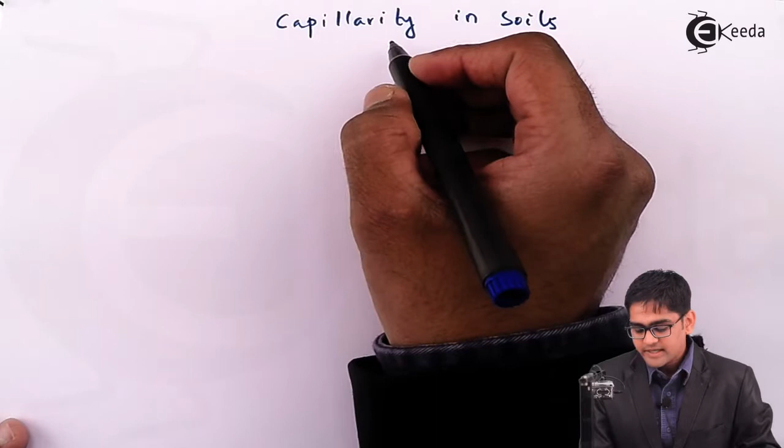So just now we have seen the principle of effective stress, and we'll move ahead with capillarity in the soil. This is closely linked with the previous chapter on effective stress. Capillarity is a phenomenon by virtue of which there will be a rise in the water level above the natural groundwater table, and therefore the soil will remain in a fully saturated condition.

So if I draw the ground level, and the groundwater table, the soil below the groundwater table is called saturated soil, remember, and the soil above the groundwater table is considered dry soil or moist soil, depending on the degree of saturation. But because we have the groundwater table, there is a tendency for something to happen.

In between two successive soil particles there will be creation of a small void, and because of this creation of the small void, water in the groundwater table will rise up to a certain level. I consider this as generally being this level. So this is the rise in water level, and this is because of capillarity.

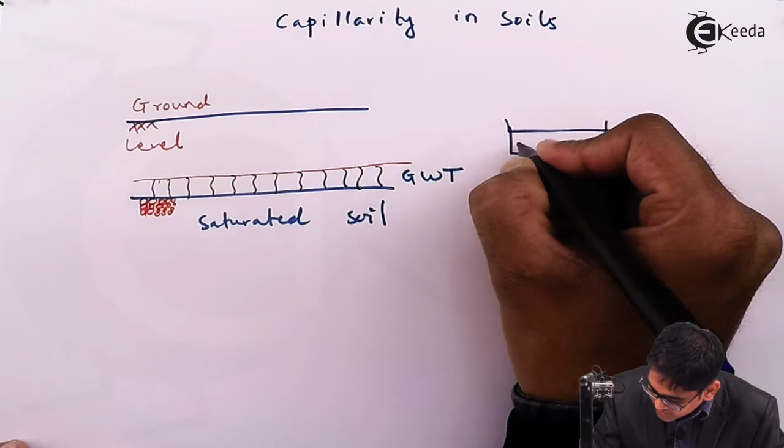This is the same phenomenon you have studied in fluid mechanics. What you studied there is very simple: you take a beaker full of water and insert a small diameter pipe. This diameter is very small. Because of the insertion of the pipe, there is a rise in the level of water, either rise or fall depending on the nature of the fluid.

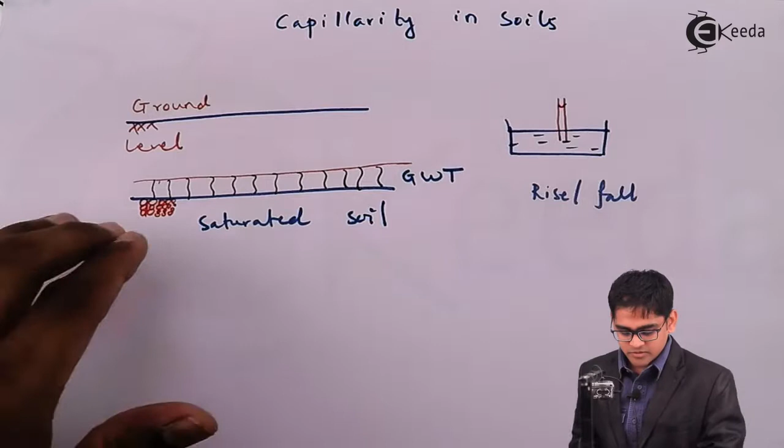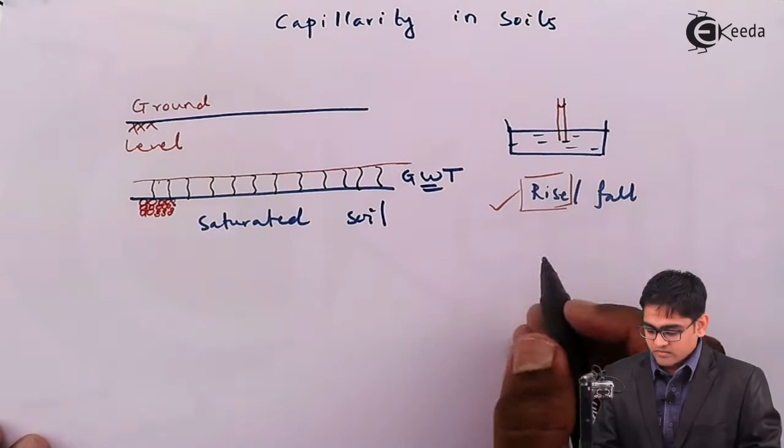Remember, there is either rise or fall. Since in case of soil we almost always talk about water, we'll deal only with this rise phenomenon. We won't speak about falling, because fall is only possible in case of mercury, as you have seen. Similarly, as I said, we'll discuss only the rise, because it's water, so in water there has to be a rise.

This zone up to which the soil is saturated by the capillary water is called the capillary zone, and the soil in this zone, remember, is fully saturated.

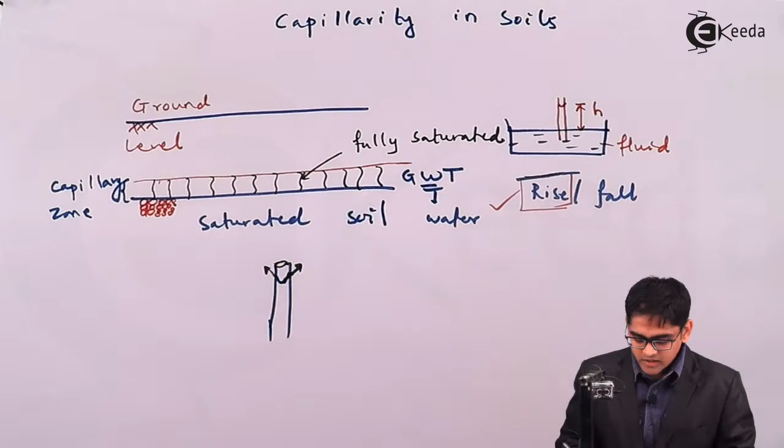This is very important, and I'll derive the expression for the rise in the capillary tube H with the surface tension properties of this fluid. It is a very simple derivation. If I insert the tube, the water will rise and form a concave shape, as shown in this figure, and along the perimeter of this tube there is a force called surface tension force acting around its perimeter, denoted by sigma.

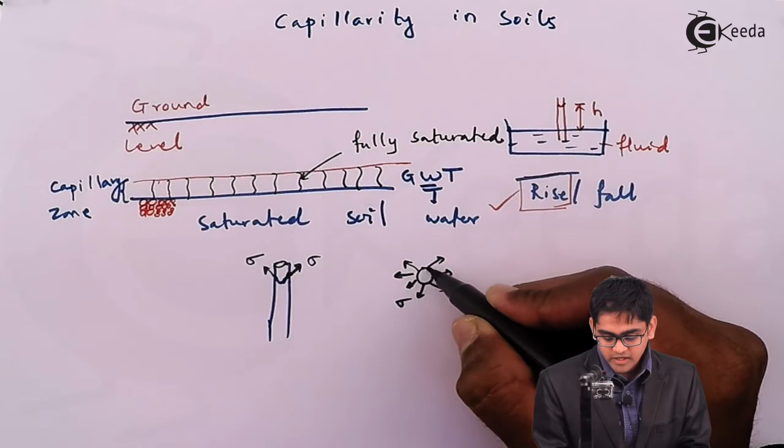This sigma, the surface tension force, is acting uniformly, meaning the force does not change as you move across or along this perimeter. This force makes an angle equal to alpha with the vertical face of the tube. This is the plan view, and this is the elevation. In plan it looks like this, and this is the diameter of the tube, which is very small, denoted as small d.

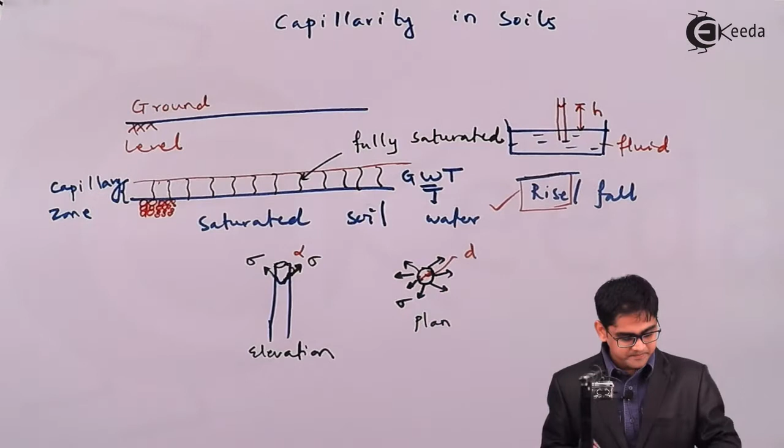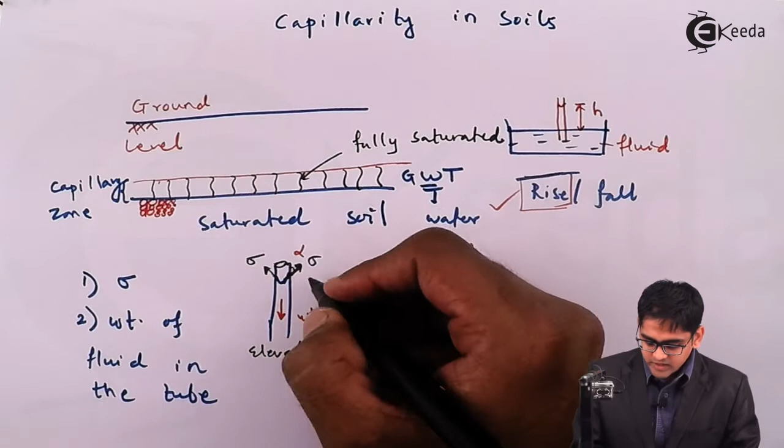So first of all you've got the surface tension force sigma, and second is the weight of water or fluid in the tube. You need to balance the weight of the fluid in the tube with the surface tension force, so that the system is in equilibrium.

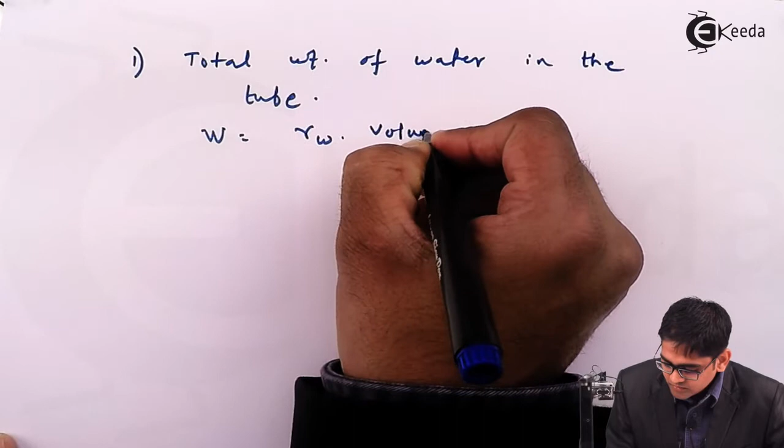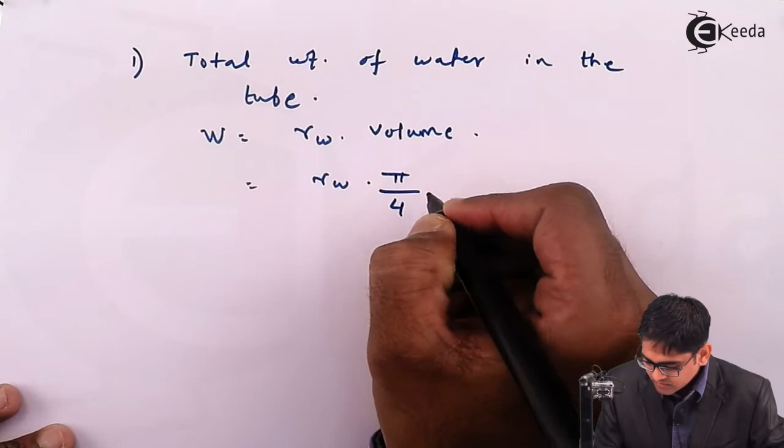So the total weight of water in the tube is easy to calculate - it is nothing but gamma, the unit weight, into volume, and volume is the volume of the tube, meaning the volume of this part only. It is pi by 4 into small d square into h, where d is the diameter of the tube and h is the height. This is how the weight is calculated in the tube.

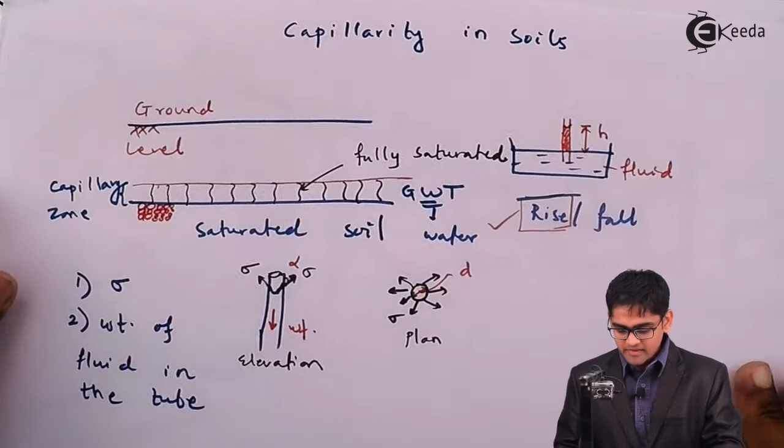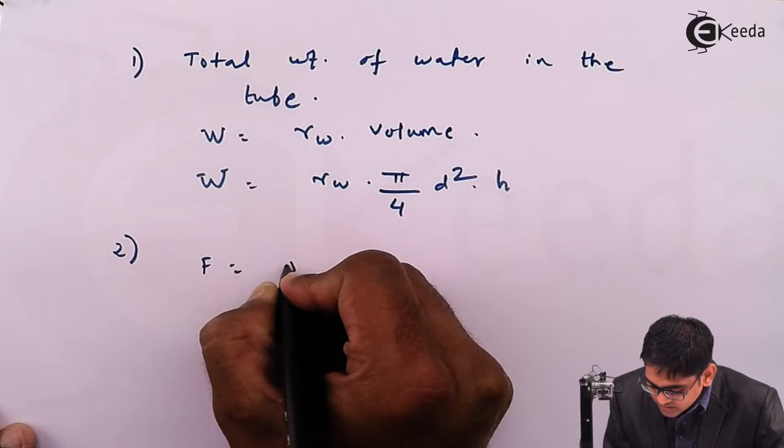Second is the surface tension force, which is responsible for pulling up the water. By virtue of the surface tension, you get this capillary phenomenon in the soil. That force is nothing but surface tension force into the area at which it is acting. Looking at this figure, sigma is the surface tension force acting all around its perimeter, so the perimeter becomes the acting area. Therefore it becomes sigma into perimeter, which is nothing but pi into d.

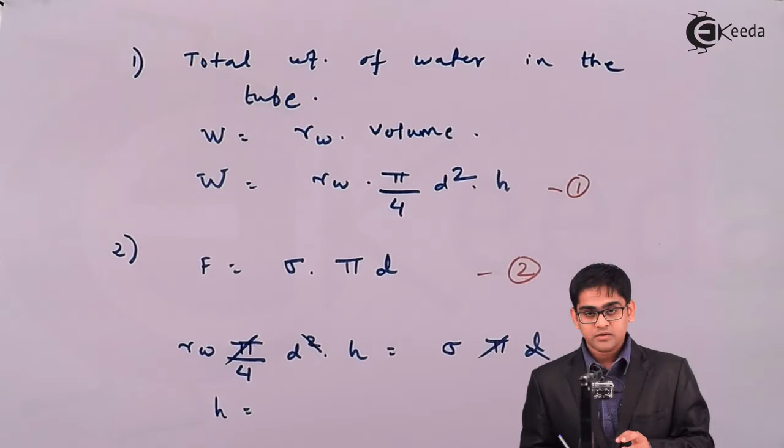So these two have to be equal, this one and this two. By equating equation 1 and 2, you get gamma w into pi by 4 into d square into h equals to sigma pi into d. Pi gets cancelled, d gets cancelled, there is nothing left to be cancelled, and therefore you get the height, which is height of either rise or fall, becomes equal to 4 sigma divided by gamma w into d.

So therefore the capillary rise becomes equal to 4 sigma divided by gamma w into d. This is again a very important expression of the capillary height rise in the soil.

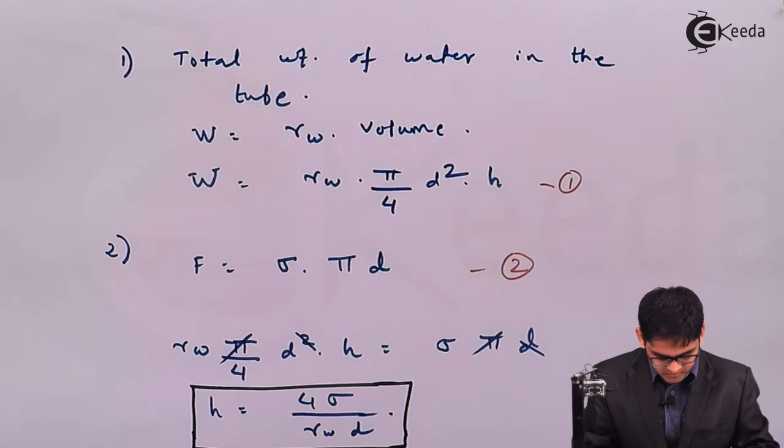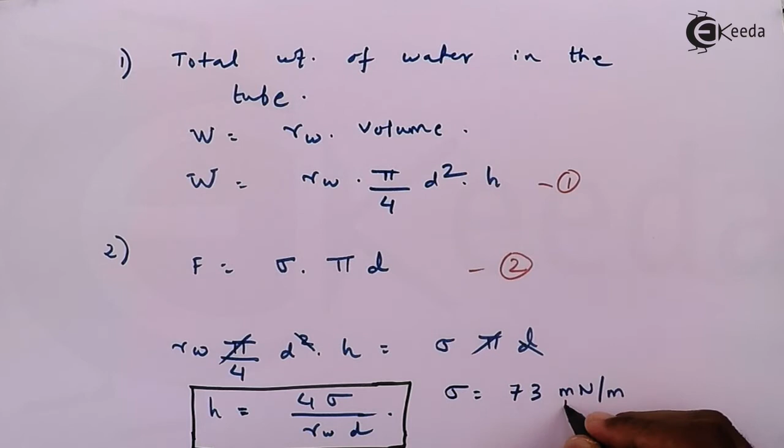This is capillary height rise, and in all normal cases for water, sigma is equal to 73 millinewton per meter. So this is milli, small m, M-I-L-L-I, milli.

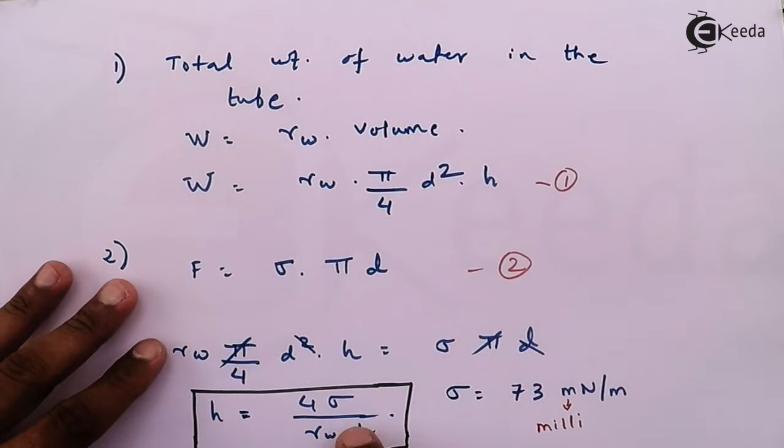So if I just place all the values in the units of Newton and meter, you'll probably get h in terms of d. So it becomes capillary height rise equals to 73 into 10 raised to minus 3 into 4 divided by 9810 into d.

You need to place d in meters. If you evaluate all this factor, it becomes equal to 3 into 10 raised to minus 5 divided by d, but remember you need to place d in meters. If you want to place d in millimeters, you'll get h equals to 0.03 divided by d, and here you will have to place it in millimeters, and this is how it is related.

But one more thing, this is the capillary height rise. So if you just reduce d, you'll get more and more capillary height rise. So as d reduces, h increases, and vice versa also true: as d increases, h decreases.

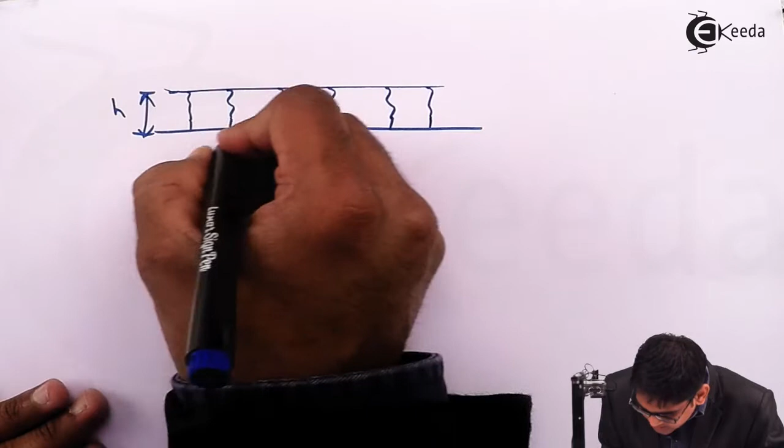So therefore I'd like to make 3 important points, which I will do in the next slide. First point is that if you got the capillary zone, suppose this is the capillary zone, and this is the height rise h, this is the existing groundwater level, and below which the soil is totally saturated.

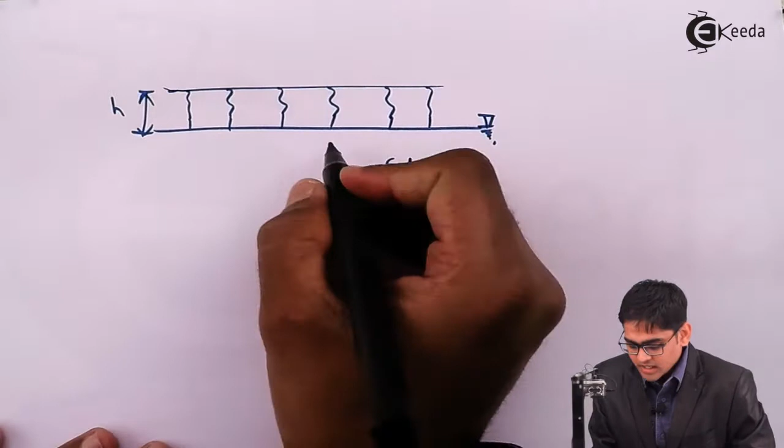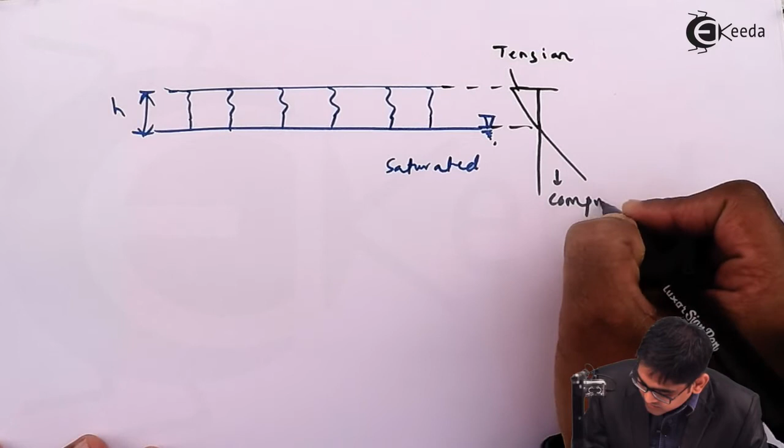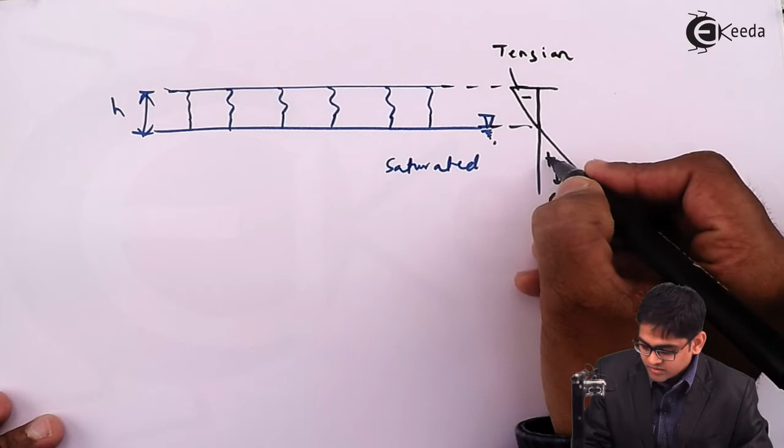Up to the capillary zone, it's also saturated. So whenever you got the capillary height rise, up to the height equals to h, there is a lot of tension into a negative side. There you got the tension, and beyond which there is a compression. Because the water is pulled up, it's under tension. So I will define tension by negative and compression as positive.

So in soil mechanics, compression is positive and tension is negative, a basic sign convention, and in strength of materials, tension is positive, compression is negative. So it actually varies, sign convention varies from one subject to another. As far as soil mechanics is concerned, remember who is in tension, who is in compression.

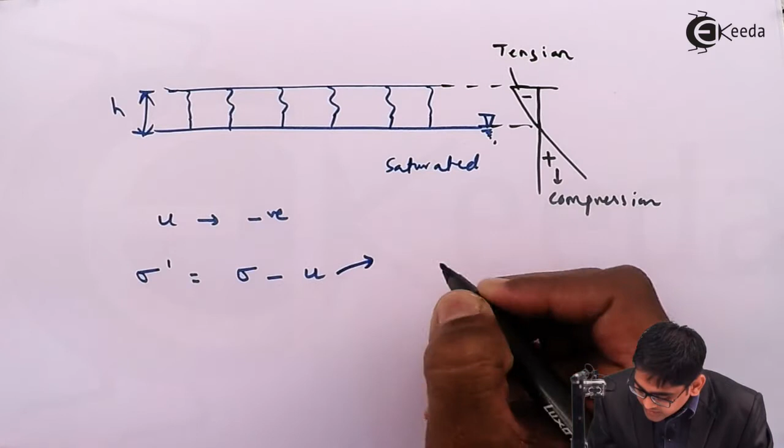So you have taken u as negative because you have taken sigma dash, which is equal to total stress minus pore water pressure. If this pressure is considered in compression, then if you're going beyond this groundwater table down, you just need to consider it with the positive sign. But in case of the capillary zone, where you end up at the tension zone, this u will become negative.

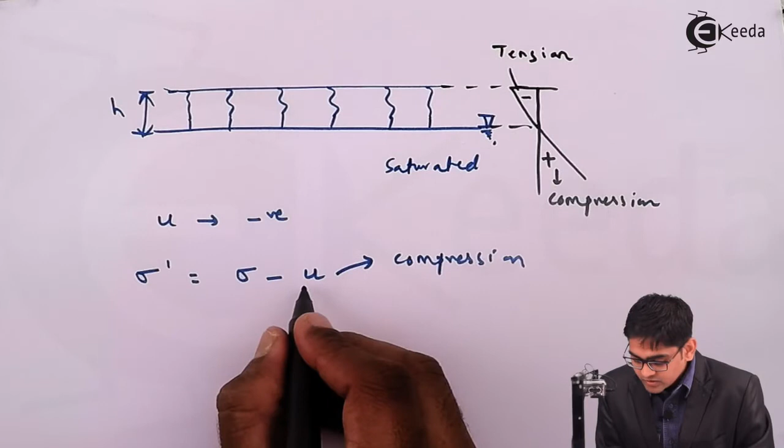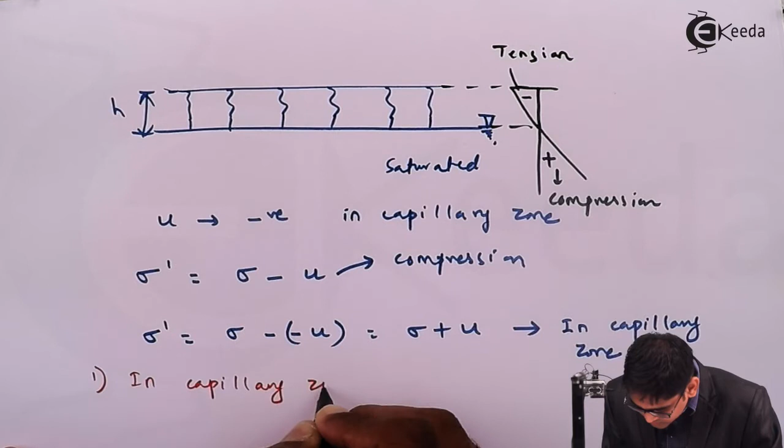Once u becomes negative, sigma dash will become equal to sigma minus of minus u, which becomes sigma plus u. So this is the expression in the capillary zone, which means in the capillary zone, effective stress increases. That is point number one: in capillary zone, sigma dash increases.

Point number two here is very important and a very crucial point. You have seen I've considered small d in this denominator part. This d is not the diameter of the grain, but d is the size of the void. Exactly, because it is ultimately a void, or the diameter of the void, which is created in between two adjacent soil particles, which is responsible for the rise in capillary action, and which is ultimately responsible for the capillarity in the soils.

But obviously this void size is related to the particle size. So there is a relation between void size and particle size, and that relation is given by Terzaghi. It is as follows: generally, what they have also given is that the diameter of the void, or size of a void, is directly proportional to the void ratio of the soil into the effective grain size of the soil, to a constant c.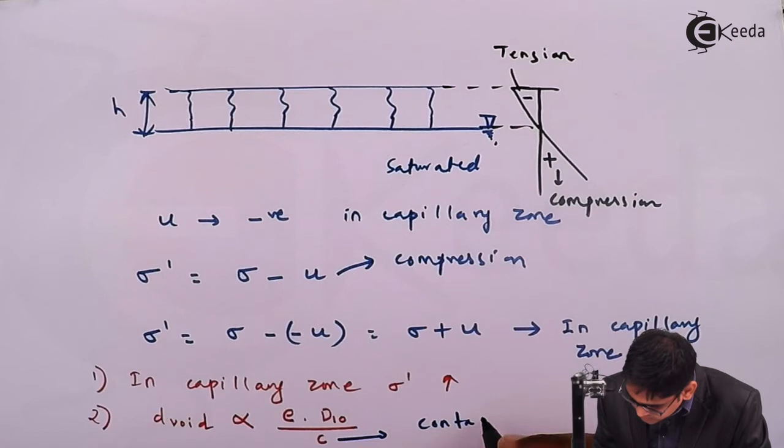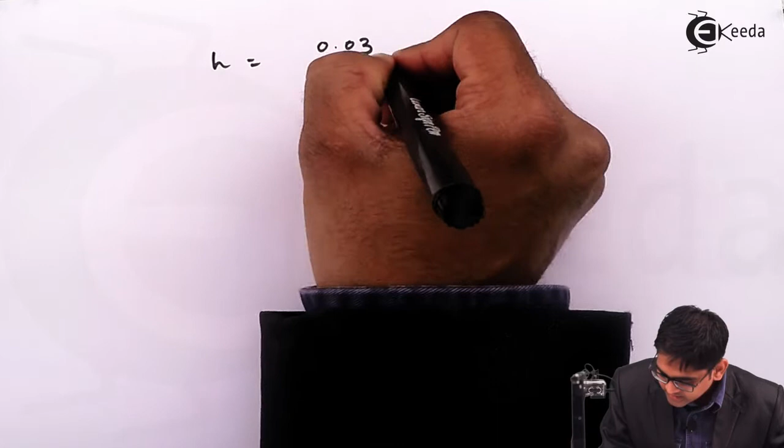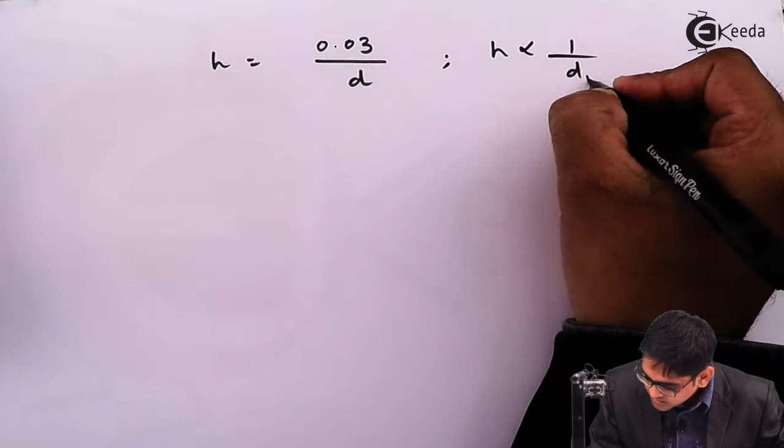They term this C as the empirical constant. After introducing this empirical constant, I'll remove the proportionality sign and make it an equals sign. If you place the d void in the existing capillary height expression, you'll get h equals 0.03 by d, where d is in mm. H is inversely related to d, and I need to place d here, because it's nothing but d void, or size of the void. So capillary height rise becomes equal to C divided by e into d10, where C takes into account this 0.03 factor and is the empirical constant.

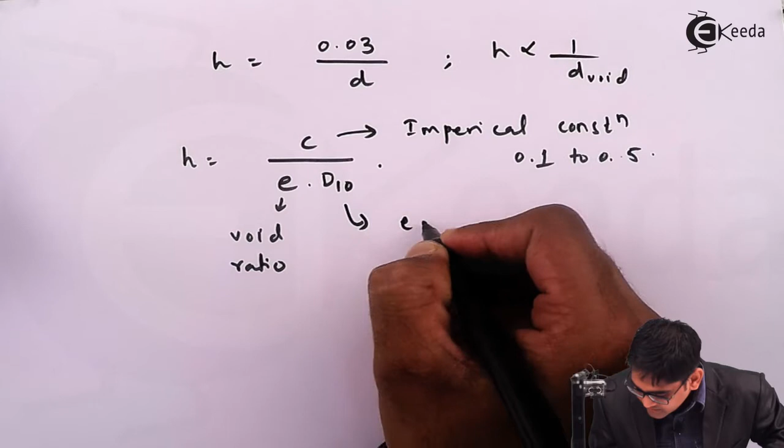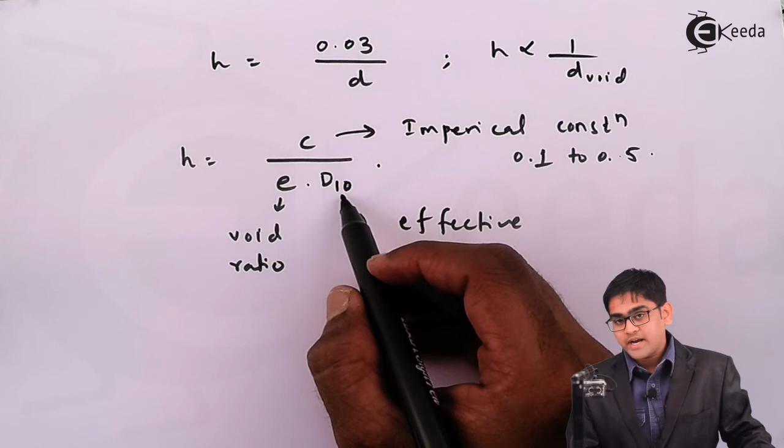It varies between 0.1 to 0.5, and e is the void ratio, and d10 is the effective grain size. We studied this in the soil classification chapter, which indicates that 10% of the soil is finer than this particular size — this is the effective size of the particle.

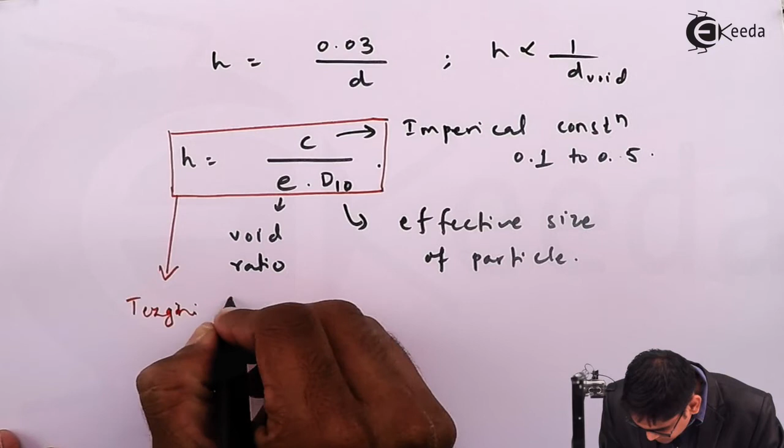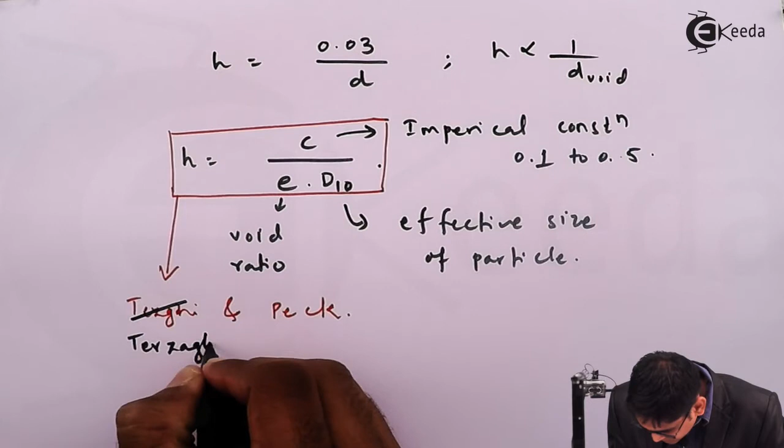So this is an empirical expression given by Terzaghi and Peck. Peck is the student of Terzaghi. Let me rewrite the spelling: Terzaghi and Peck. Terzaghi, as you're aware, is the father of soil mechanics. So this is point number 2.

Point number 1 is that in the capillary zone, because of the tension, effective stress increases. Point number 2 is the clarification about the diameter of the void, or size of the void, which is related to the final effective grain size diameter.

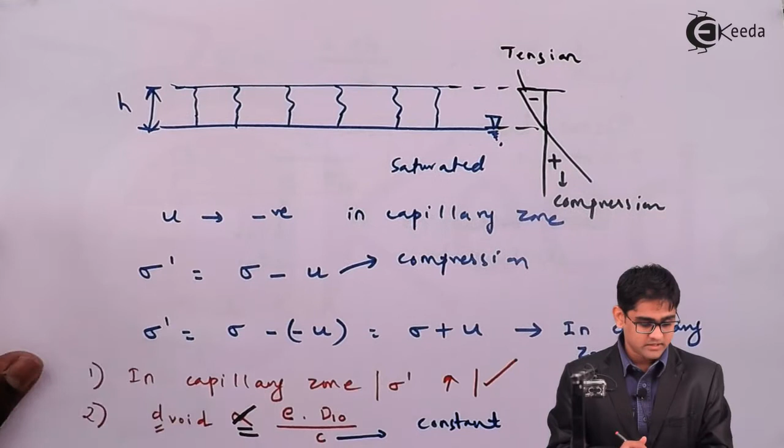Based on point number 2, I will introduce the third point. This table is given by Hansbo in 1975, which gives a clear identification of coarse-grained and fine-grained soils. As we've seen in the soil classification chapter, we have two broad classifications: coarse-grained soils and fine-grained soils. In fine-grained soils we have silts and clays, and in coarse-grained soils we have sands and gravels, along with boulders and cobbles.

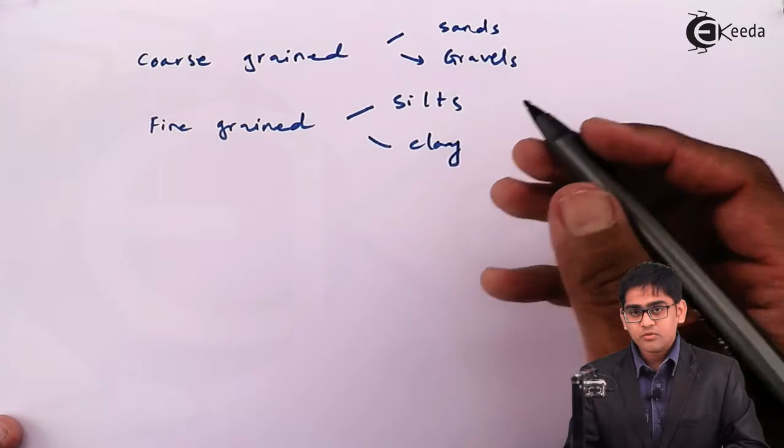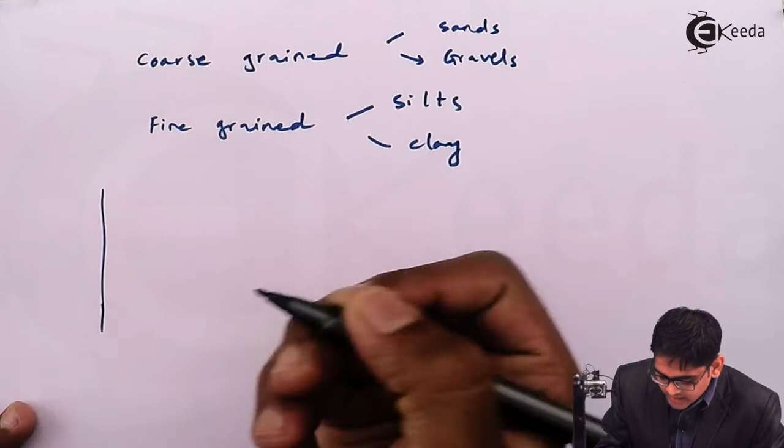Based on this soil classification, Hansbo in 1975 gave a table indicating the type of soil and the capillary height. So here it's the type of soil — he considered coarse sand, fine sand, and medium sand. First is coarse sand, and here is the capillary height, h.

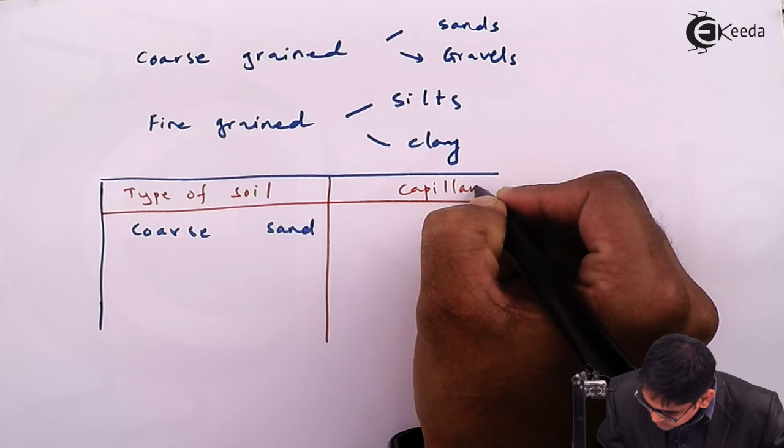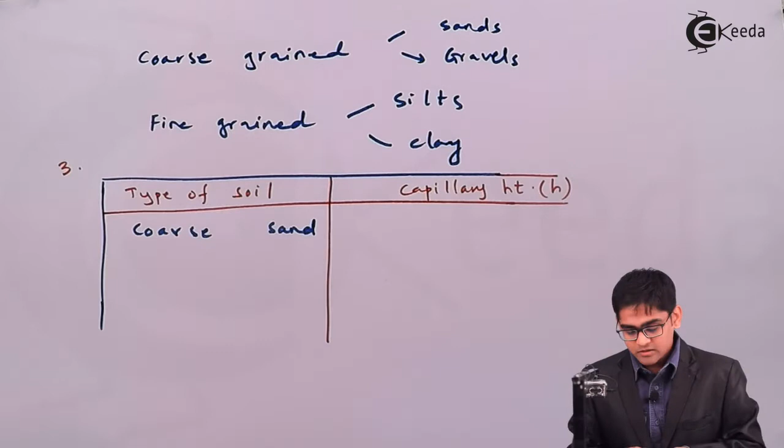In continuation of these two points, I'm highlighting this third point, which is very important. As in the second point we saw, capillary height rise h is C divided by e into d10, which was inversely related to d. Capillary height rise is inversely related to d. So there's a direct relationship between the void and the particle size.

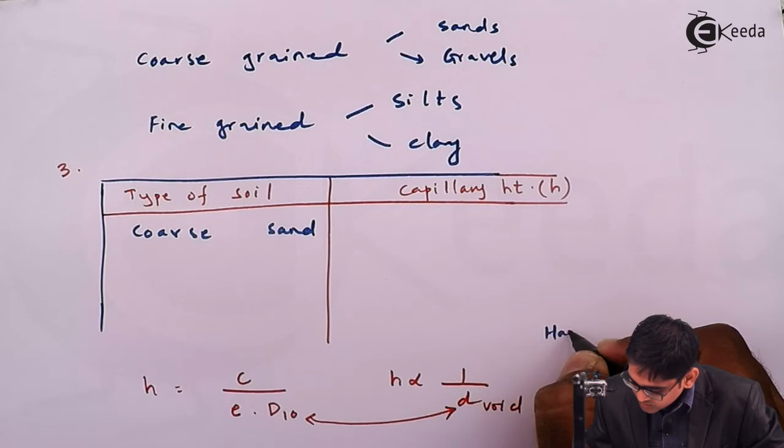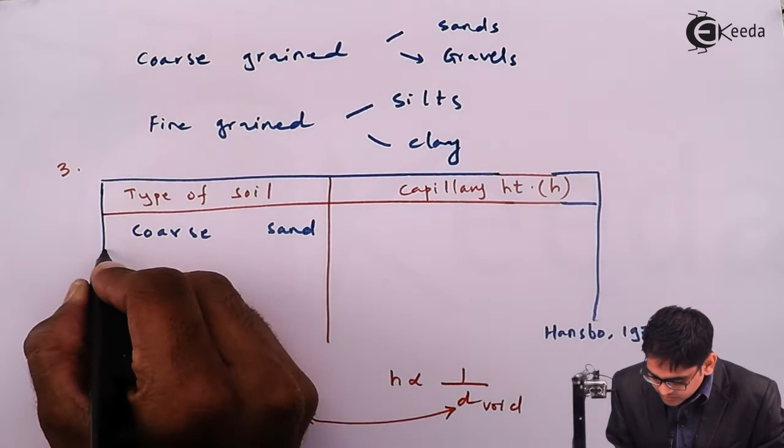As you decrease particle size, d void will go on decreasing. That's also been researched by Hansbo in 1975, who gave this table. So for coarse-grained soils, particularly coarse sands, the capillary height ranges between 0.03 to 0.15 meter — it's fairly narrow.

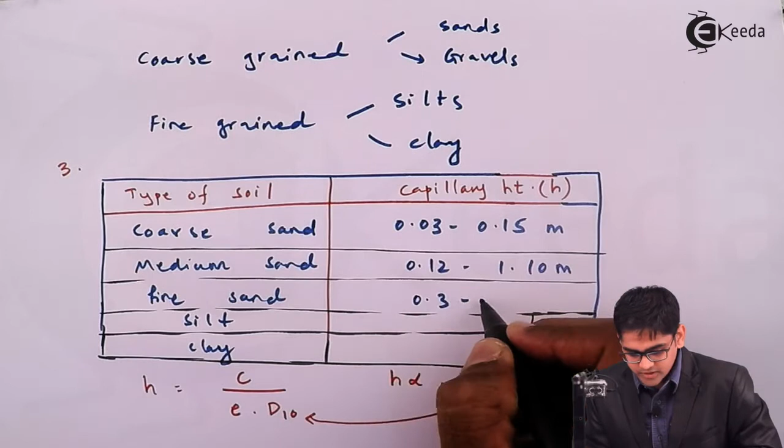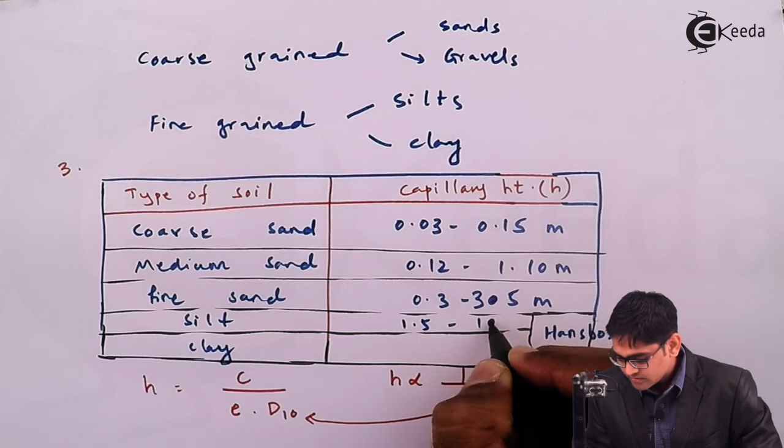Then medium sand, fine sand, silt, and finally clay. For medium sand, the range is between 0.12 to 1.10 meter. For fine sand, it's 0.3 to 3.5 meter. For silts it's 1.5 to 10 meters, and for clays it is more than 10 meters.

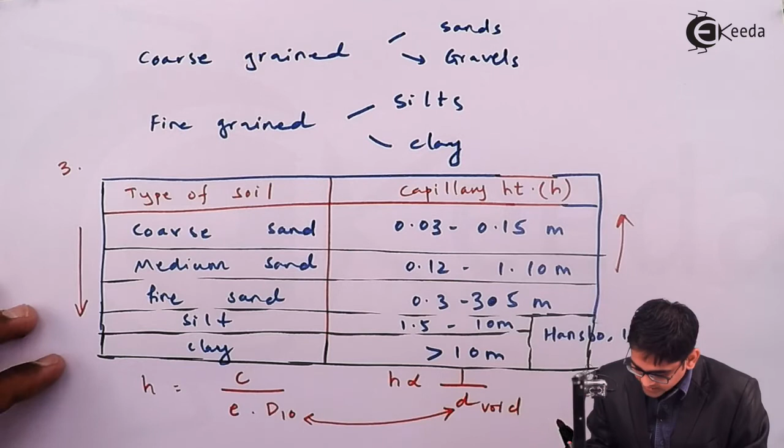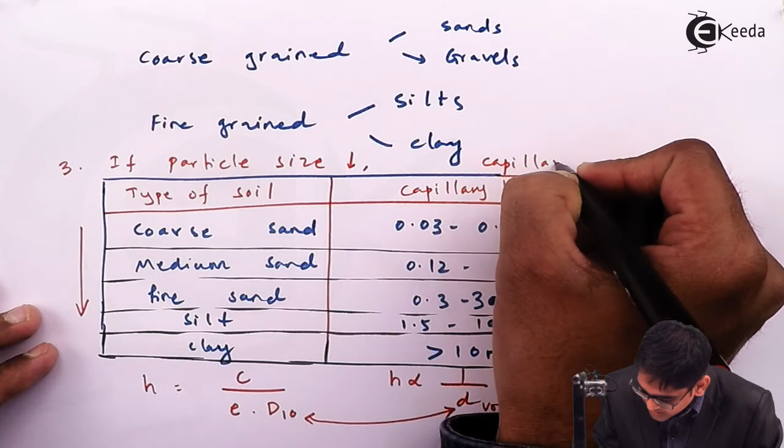So for clays, as particle size goes on decreasing, the capillary height goes on increasing — that's again highlighted by Hansbo. So remember, for the third point: if particle size decreases, capillary height increases. Particle size and d10 are directly proportional, so as this decreases, this increases.

Similarly, as particle size decreases, h also goes on increasing, because particle size and the diameter of voids in the soil are directly related. So we have seen the concepts related to capillarity in soil — three major concepts. First, because of capillarity, effective stress goes on increasing. Second, it is not the diameter of the grain which influences capillarity, but the diameter of the void, which is ultimately related to the diameter of the grain.

To repeat, we've seen that it's not the diameter of the grain that's responsible, but the void or size of the void that matters, which is inversely proportional to the capillary rise in soils. In the third point also, we've seen the same extension of the second point, along with the clarification given by scientist Dr. Hansbo in 1975.

Now we see the practical application, or where this is applied in the field. Probably you have visited a nearby seashore a couple of times. So near a seashore, I'll draw a section.

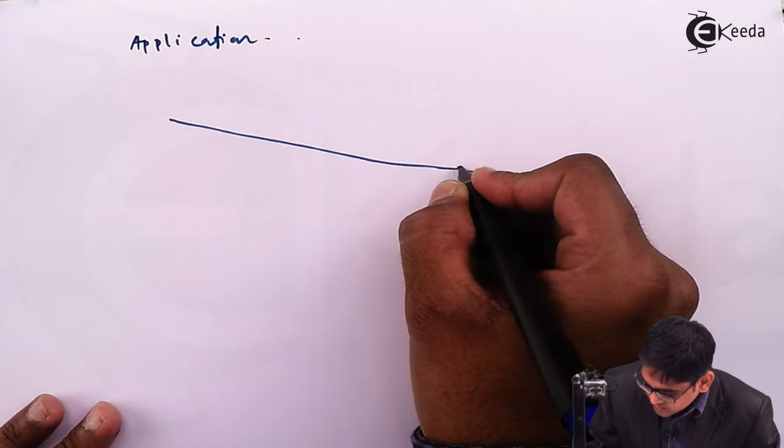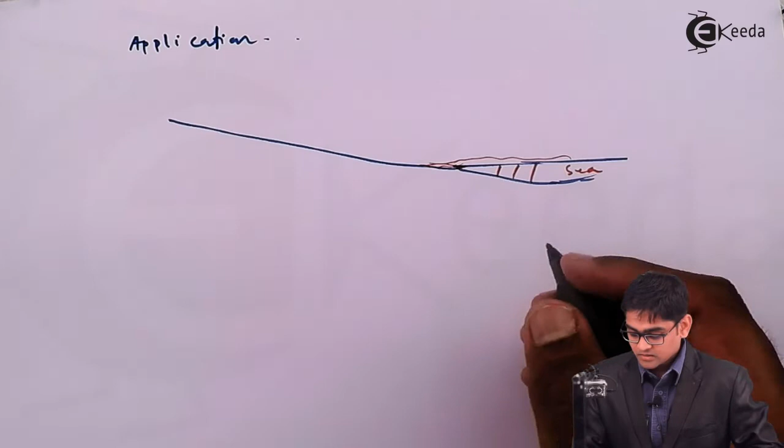So I consider this as a sea. From this point there are the waves which are coming up, so probably you have visited nearby offshore or onshore areas where you see this whole diagrammatic representation, and this is the water table or water level in the sea, and as you go on you get into deeper and deeper sections. So this water level in ground, I'll join it this way.

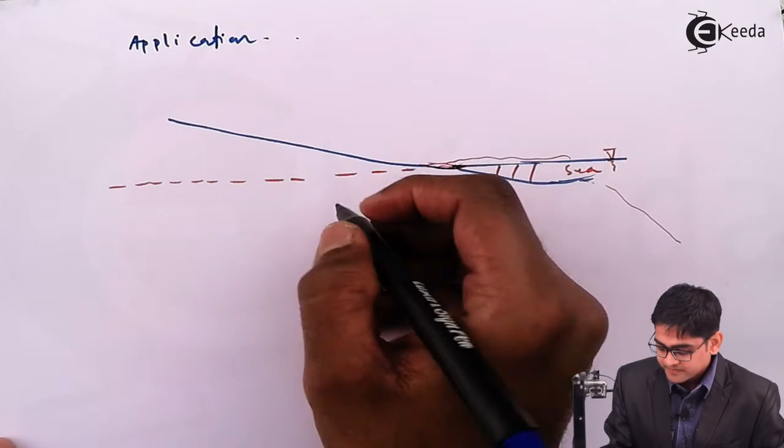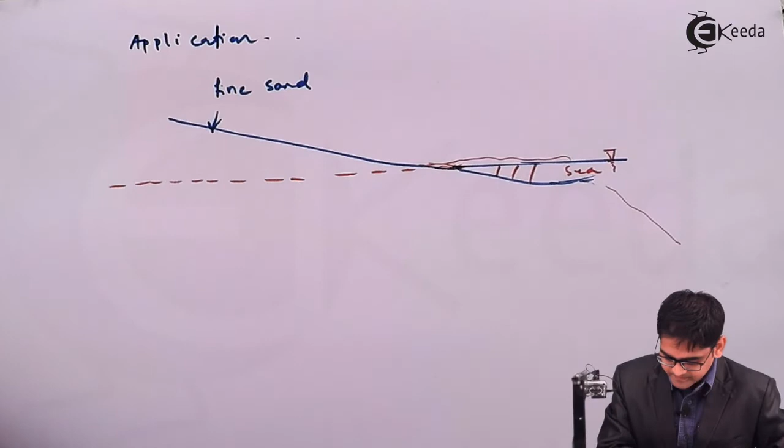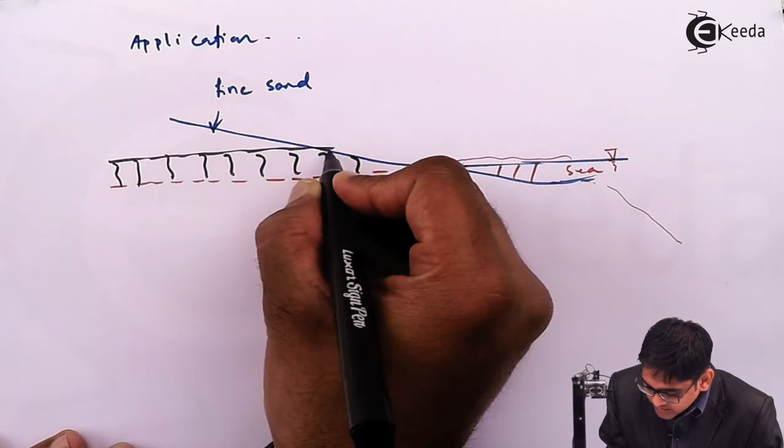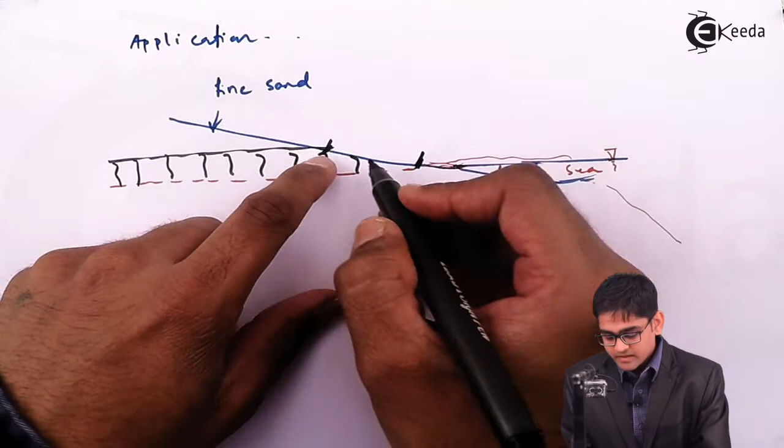Because of the water which is in tension, on this particular soil you're probably able to walk, able to have a good ride only at this portion. But after this portion, once it goes beyond that, you've got only the dry sand. So barely can you walk, barely can you run on this soil, because it is very difficult to run on this particular type of soil as you've got very poor strength.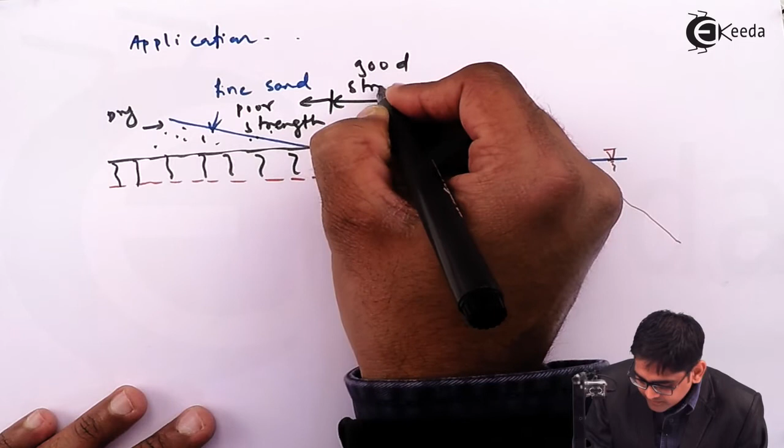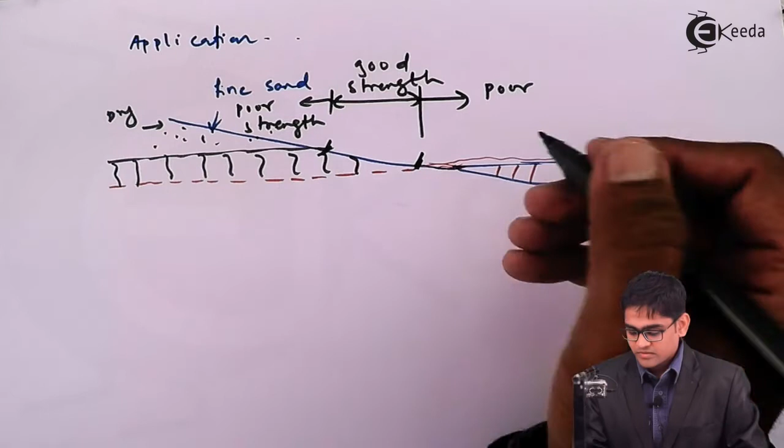So here you've got very poor strength of the soil, and in this region only you've got good strength because of this capillarity effect. Hereafter we are not bothered, because it's submerged in the water, you've got poor strength in the soil after this point. So this is the region where I'm interested, and this region is only because of this capillarity.

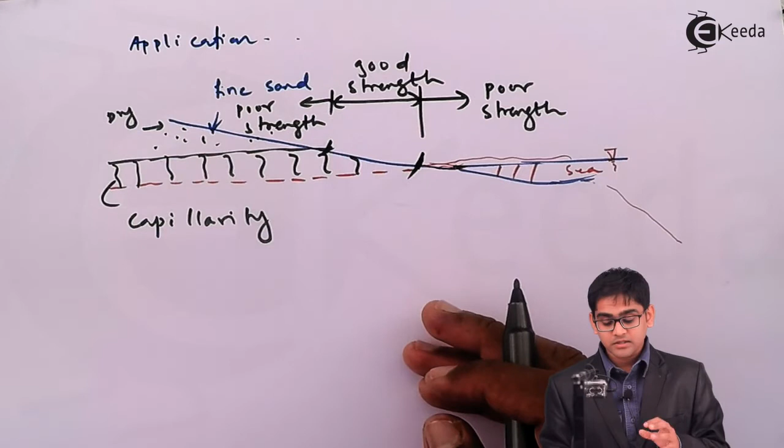So this is the particular application of capillarity in the seashore or nearby seashore areas, where you get very good quality soil, and you are able to run, walk, or play around on this soil. This is a theoretical explanation because the capillarity is linked to this concept. So this is the first application.

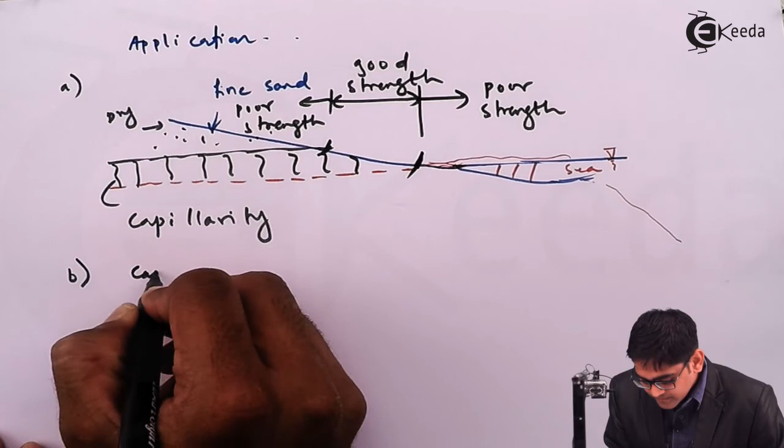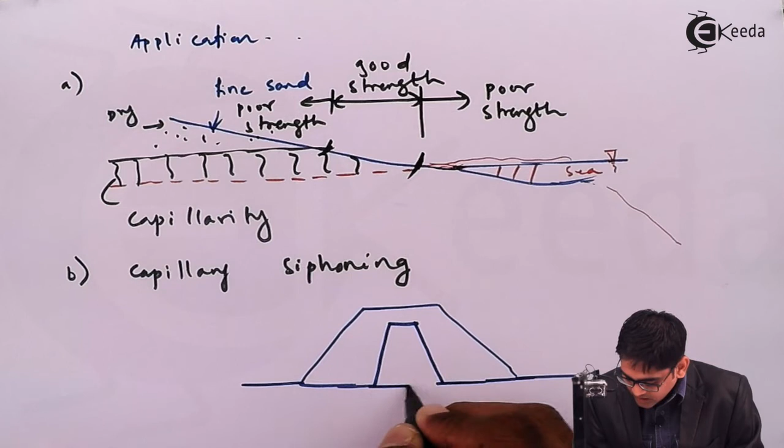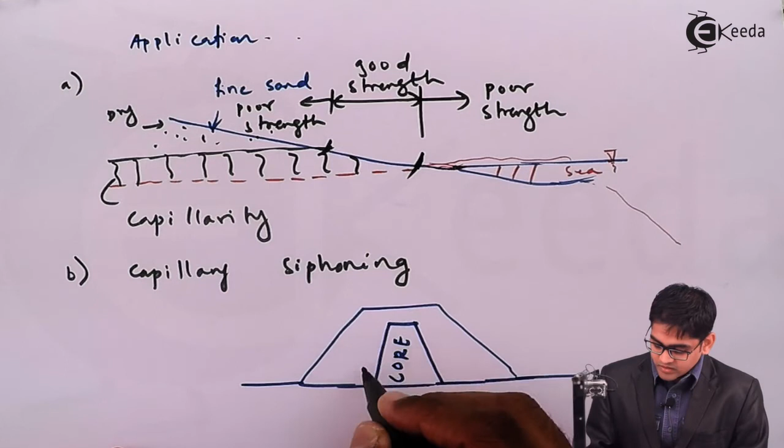Second application, or the second terminology, is nothing but capillary siphoning. In this concept I'd like to clarify more about the earthen dam. Remember, in earthen dams what is done is you build a core at the middle, or at the heart of the dam. This is the core, and generally the core is made up of very impermeable soils like clays and silts, and here we've got the coarse grained soils all around the core.

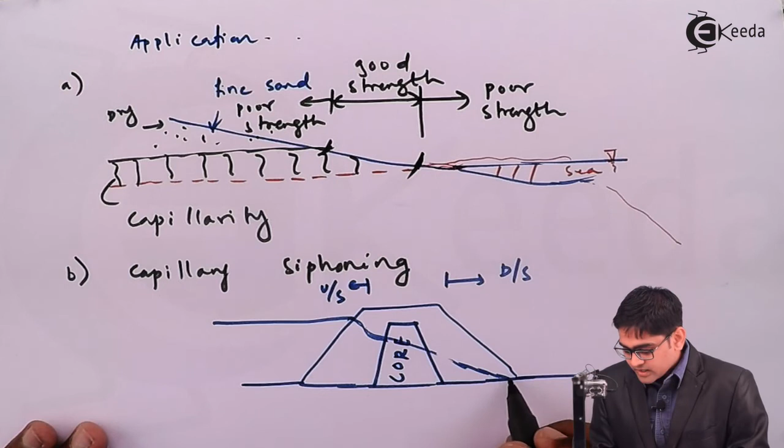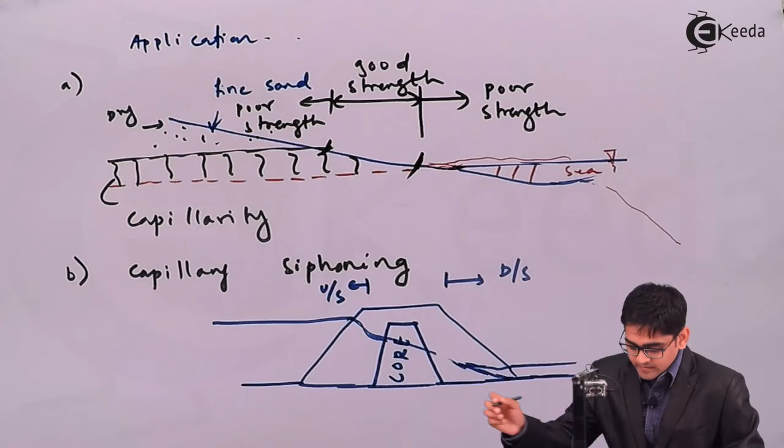Normally once you start retaining water on the upstream side, this is the upstream side and this becomes the downstream side. So what happens is the water starts percolating through this core, and because you've placed very impermeable soil in the core, the infiltration rate, or the rate at which water moves, is very less. So we get this phreatic line, and we get very little amount of water in the downstream. So water is percolating and there is a flow through this type of soil.

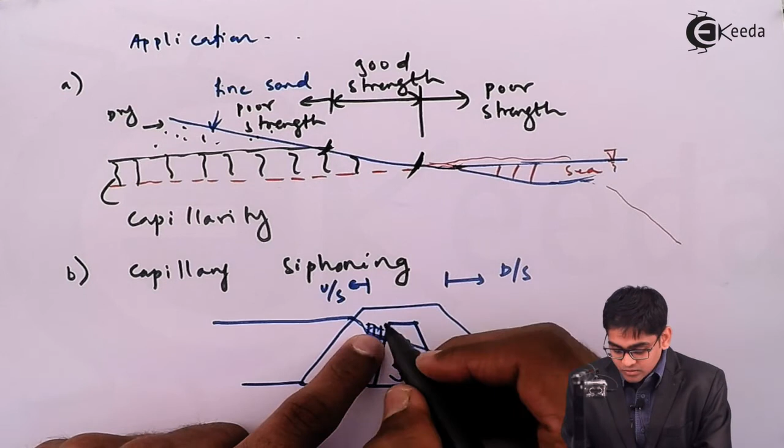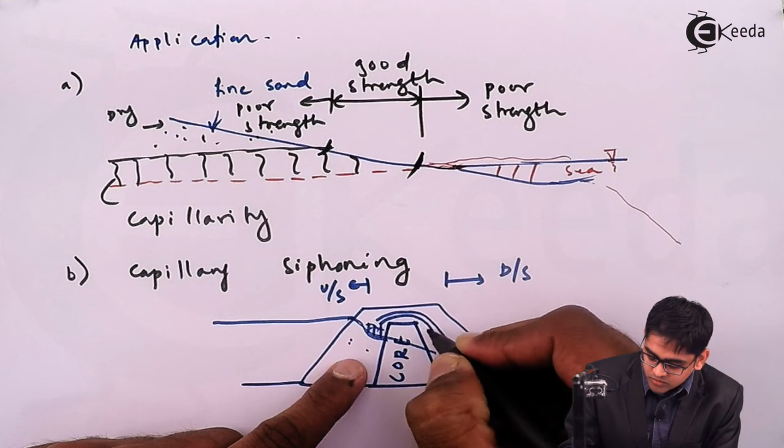So what happens, because of this particular soil on this side after the core starts, there will be a zone of capillary action. But remember, this zone is only restricted to this level. Because of this particular rise in height, the siphonic action will happen, and more water will be pulled to the downstream end. So this is a very serious issue, because the drawing or siphoning action will increase the flow rate.

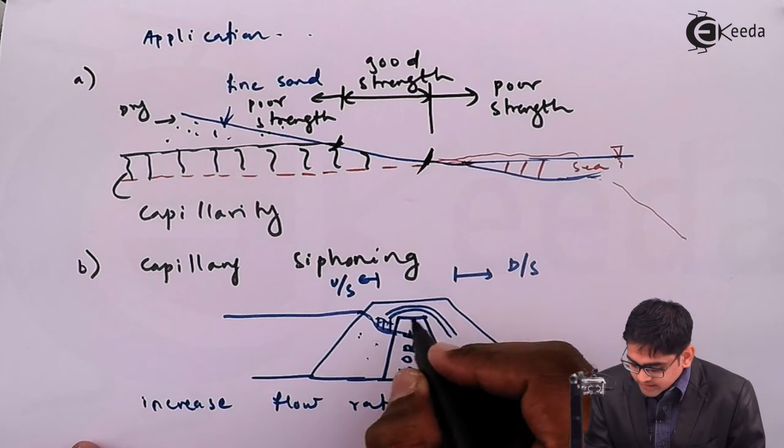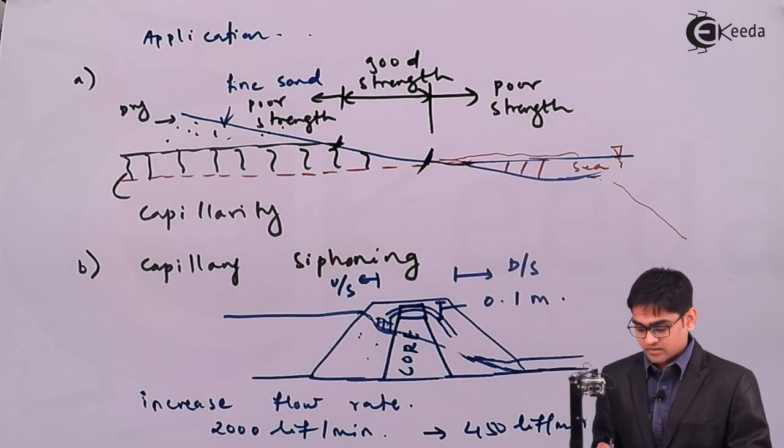In the practical situation it is done in Berlin. Because of this siphonic action, they observed a rate of around 2000 liters per minute, and this rate was brought down to 450 liters per minute by increasing the height of the core by just about 0.1 meter. So this is the practical example of capillary siphoning.

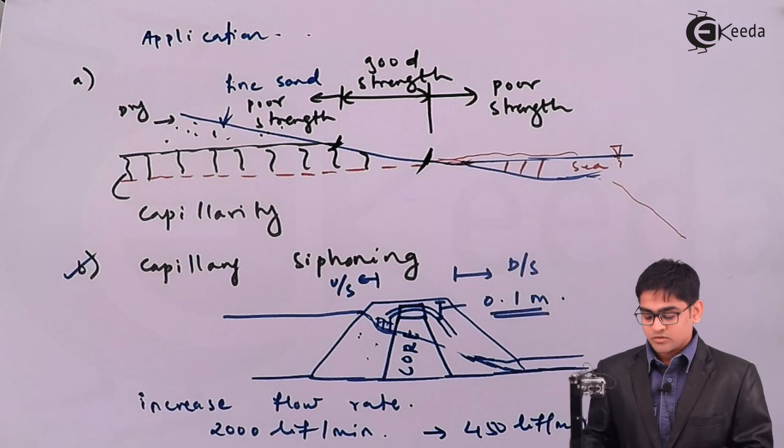It's a very special case, and a very practical one, because you've seen just the normal siphon, but the siphon happens because of the capillary action as well - once the water finds its path, it will move out, trace its way, and dissipate all its energy. Remember, the water which has got very high strength finds its way by deteriorating all the civil engineering structures. So this finishes the total capillarity chapter, and we'll discuss the permeability of the soil in the next chapter. Thank you.